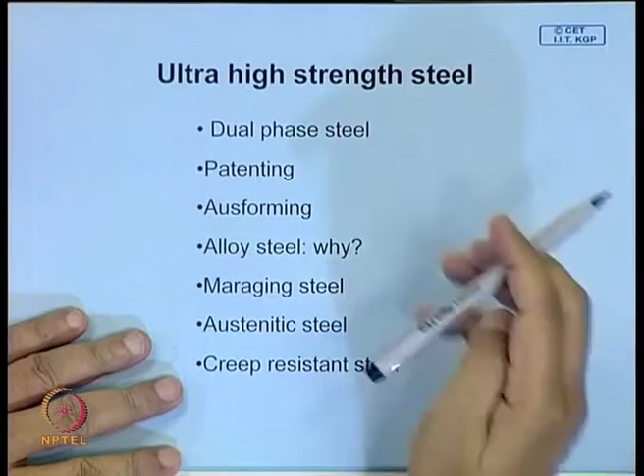of ideal strength of metals. So under this we will talk about several techniques which have been applied. We will talk about a few, like dual phase steel, a special process called patenting, and ausforming. In many of these cases, using these it is possible to attain very high level of strength even in plain carbon steel. Now the question then comes up, why do we then go for alloy steel and unnecessarily increase this cost, because most of the alloy additions which are made are quite expensive.

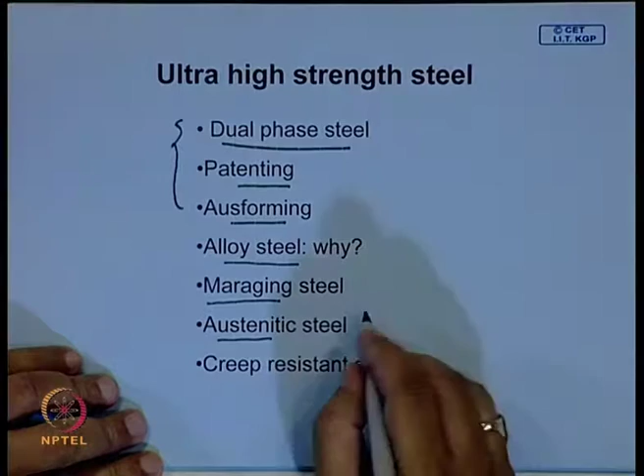We will know why we go for alloy steel. We will talk about two different classes of alloy steels which have very high strength and some very interesting properties. We will talk about Maraging steel, and austenitic stainless steel, primarily its stainless property. Also we will know how our understanding of the principle of physical metallurgy has made it possible to develop the type of steels, creep resistant steel, which are being used in several high temperature components.

Now let us talk about this dual phase steel. In a dual phase steel, what we do is a normal heat treatment process. We heat, suppose this is the composition of steel, this is the part of the iron carbon diagram - this is austenite, this is ferrite plus cementite region. So the normal structure is something like this.

Of this particular composition, you will have pearlitic regions and you will have ferrites, these are ferrite grains. So it is made up of two distinct regions - these are the primary ferrite and this is pearlite.

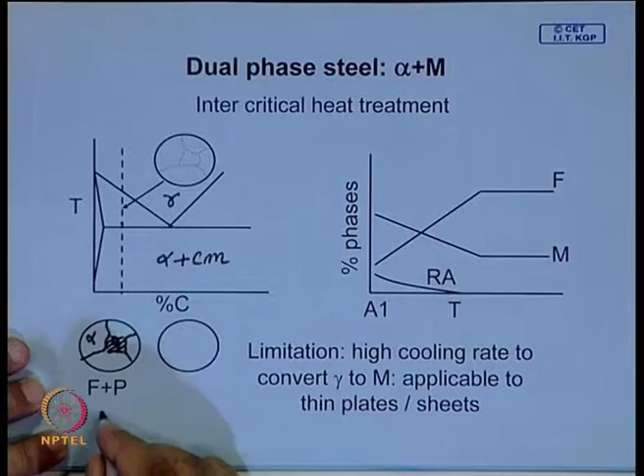You can also see the composition - this point will be giving the composition of ferrite, and this point will give you composition of austenite. Now what will happen, suppose you quench from here, then these ferrite parts will remain unchanged, but this austenite part will convert into martensite. And then instead of ferrite pearlite structure, you will get ferrite martensite.

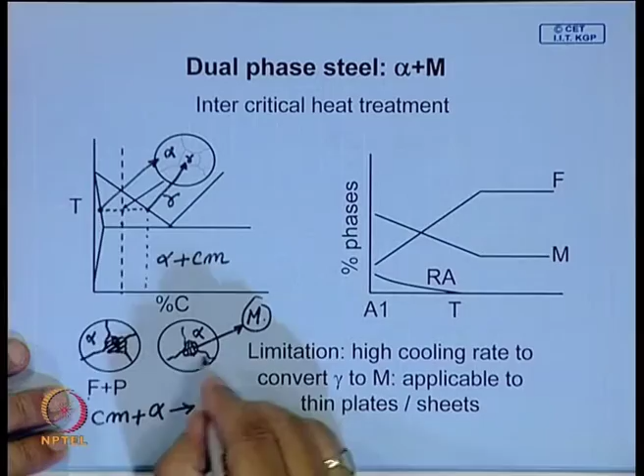And this martensite, since its carbon content is high, it will have very high hardness. So you have a composite material sort of thing, a duplex structure, and this is the advantage of this intercritical heat treatment, which can be implemented in mass production as well.

And what you see is that depending on the temperature at which this intercritical heat treatment is given, you will have different amounts of martensite. If you go higher, say beyond this point, it will approach zero. So beyond this, it will be totally austenite, and if you quench, part of it will convert into martensite and part will form ferrite.

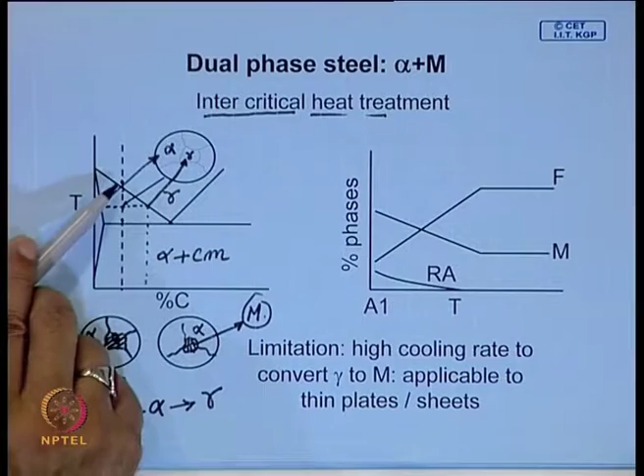So if you quench directly from here, because it is a low carbon steel with low hardenability, even if you quench it very fast, you may not get completely martensitic structure. So this is the critical point - this is A3. So if we say this is A3, if you go above A3, then there is not much of change.

You have a very small amount of martensite and it may have mostly ferrite. This is the percentage phase.

Whereas, if your intercritical heat treatment is given here, then you are likely to have, here, that amount of austenite will be proportional to this region, this line. Amount of ferrite is this, but this martensite, so amount of martensite, so this will be that equilibrium amount.

So even if you quench, you are likely to get some amount of retained austenite, and this will goes on decreasing. So your total structure, say over here, if this is the intercritical heat treatment temperature, it will be ferrite, martensite plus retained austenite, and as you increase the temperature, amount of retained austenite goes on decreasing, and here of course, you will get ferrite and martensite.

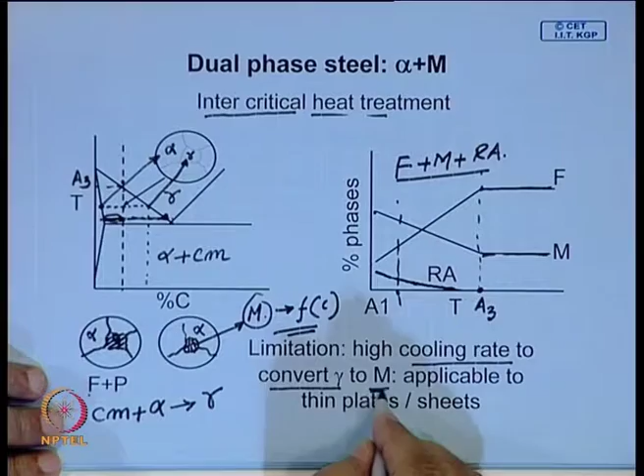that austenite to martensite in plain carbon steel, and it is applicable to thin plates and sheet. So the size limitation stays.

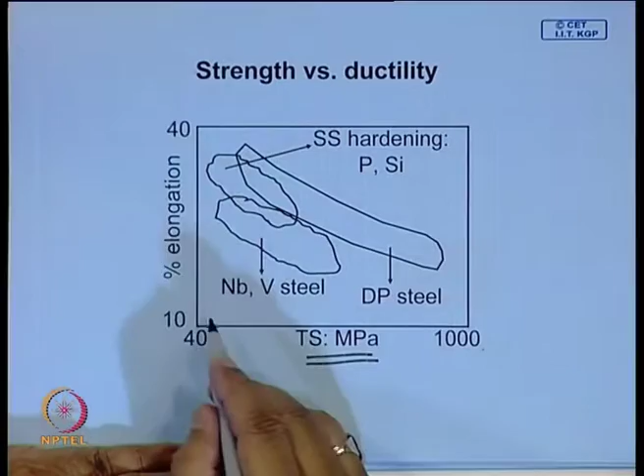Now, dual phase steel, what is most attractive is this gives a better combination of strength and toughness, because in many applications we know that strength may not be enough, it must have a very high degree of ductility. Look at this, this is the region of the dual phase steel, and how does it compare with

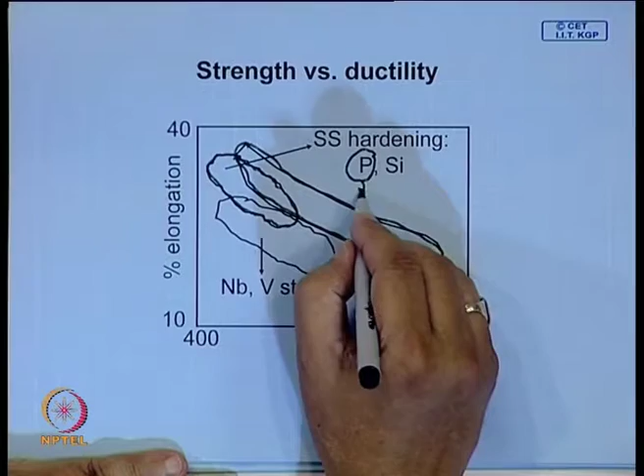conventional steel? Conventional steel's main strengthening mechanism is solid solution strengthening, and solid solution of phosphorus has a very high degree of strengthening, little phosphorus can significantly increase the strength, but it segregates, it makes the steel brittle. So these are the problems.

Silicon is a common solid solution strengthener. Manganese of course does improve, but it is not as strong as phosphorus or silicon. And grain refining is the key strengthening mechanism in case of microalloyed steels.

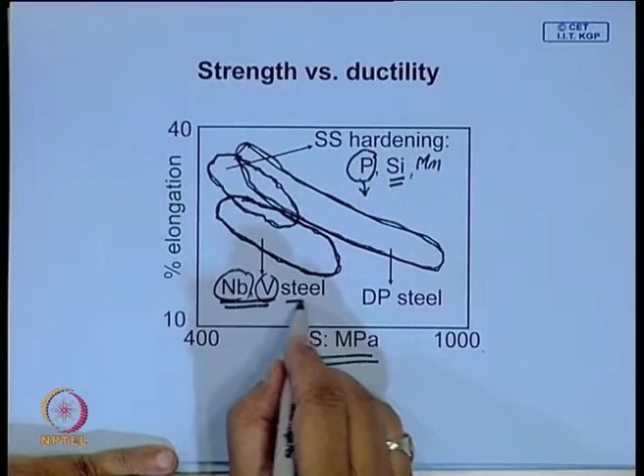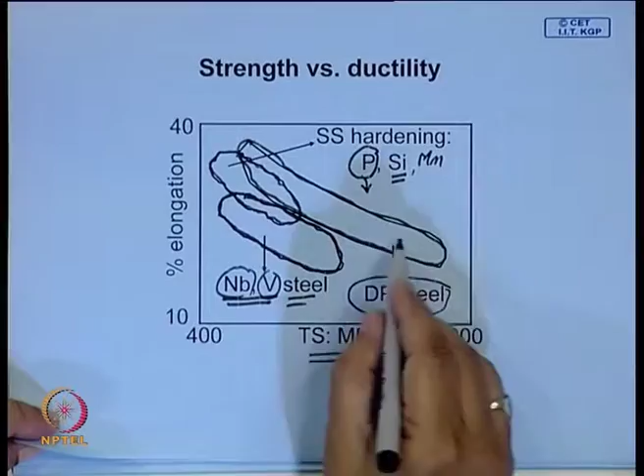So where grain refinement, we looked at it critically. So niobium and vanadium, carbides and nitrides of these elements are the key constituents which inhibit austenitic grain growth, and you get a very fine structure. So compared to all this, dual phase steel has a better combination of strength and ductility, and it also has good formability. That is why there is a special attraction for dual phase steel.

Next, let us consider a special heat treatment process called patenting. This is an isothermal heat treatment process, and it gives very high strength steel wire. This is used to produce high strength steel wire.

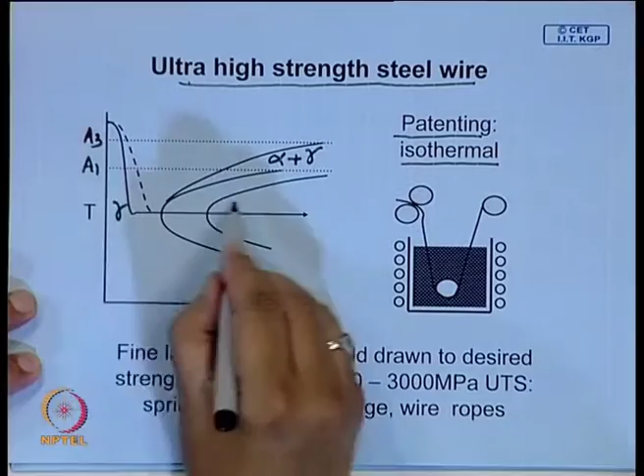If we look at the time temperature transformation diagram of steel, this is the A3 temperature, this is A1, and here you have ferrite plus austenite, this side is austenite. What we tend to do is cool the steel from above, from the austenitic region. When it is austenite, you cool it almost to the nose here.

So this is the temperature of the surface which will cool fast, this will cool slow, this is surface, this is the core, and you maintain it in a bath, a liquid bath consisting mostly of lead. If you have a liquid metal bath, this whole time may help in making the temperature uniform and allow it to cool, allowing transformation to complete at the same temperature.

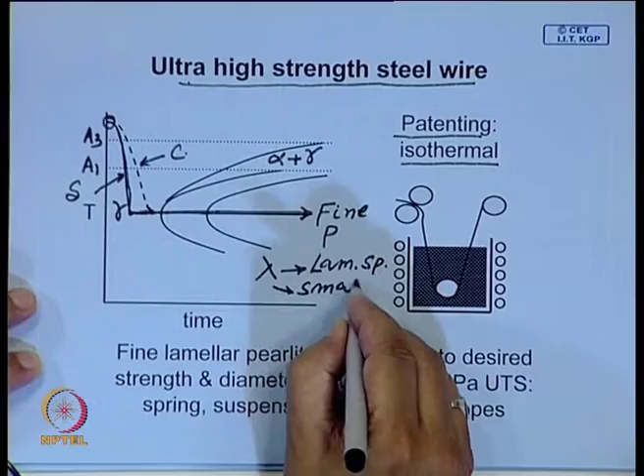And what we are trying to get is fine pearlite, that means the lamellar spacing lambda is very small, and under an optical microscope the pearlite will not resolve.

So normal pearlite you do see these kinds of lamellar structure, but the main idea is if you look in a standard optical microscope, maybe you will find that most of these pearlite nodules are not resolvable. And how is it done?

So these are some guide rolls, and this is an idle guide. So this is a lead bath, molten lead, and this passes through here.

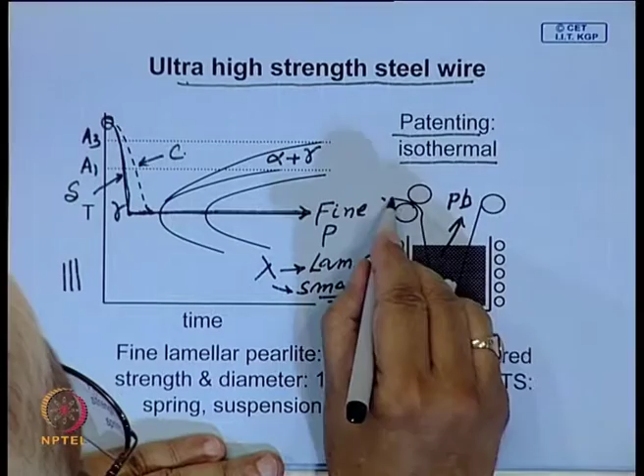You may straighten this in a roll, and sometimes you can heat it also. You can apply some voltage between this and this, and this is a lead bath, with heating coils. This can be set up easily in the laboratory, and you can apply some voltage.

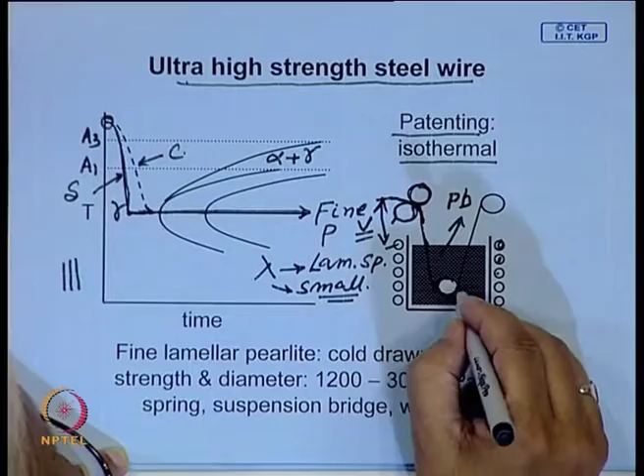Then the wire gets heated up, and this temperature is above A3. It comes into the lead bath, and this is just a guide idle roll, and this wire comes out and it coils here.

By this treatment it is possible to get extremely fine lamellar pearlite, which has excellent drawing properties, so they can be cold drawn to desired strength and diameter. You can get a strength of the order of gigapascals.

These are used for very high strength applications like springs, suspension bridges, high tensile wire ropes. Strength will increase definitely as the percentage carbon goes up.

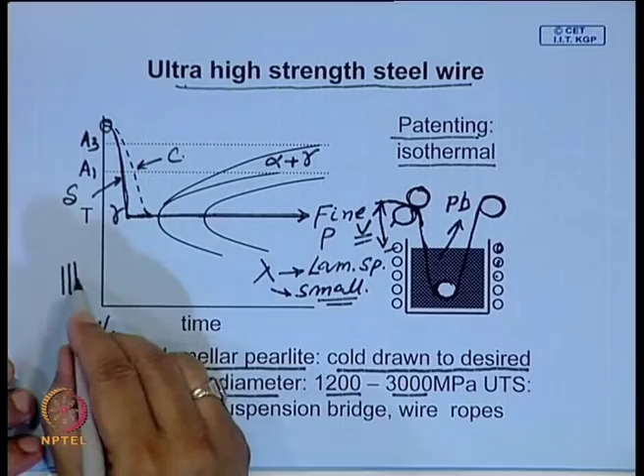In fact, this lamellar structure, when you give such high cold working, say 90% cold work, these lamellar spacings become even smaller. With the transmission electron microscope, people have seen these spacings come out to be of nanoscale dimensions as a result of such large deformations, and that is responsible for such high levels of strength.

Now let us look at another special forming process called Ausforming. In microalloyed steel, what we found out is if you work austenite at a lower temperature, that austenite will not recrystallize, and these austenite grains, if you deform in one direction, become highly elongated.

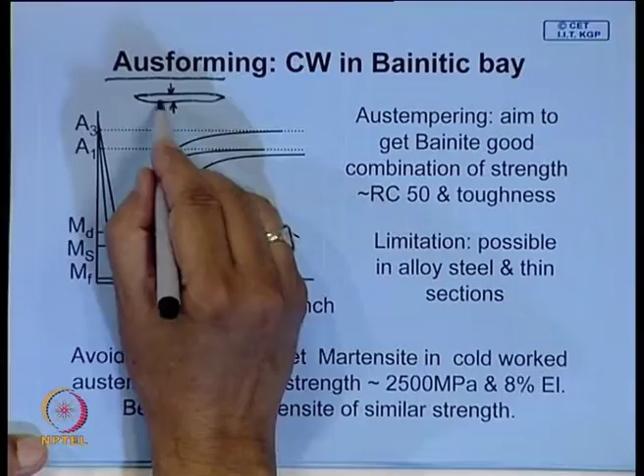So at least in this one direction they become extremely small in dimension, and they do not recrystallize. So they will also have high dislocation density, so rho will be high, the dislocation density is high.

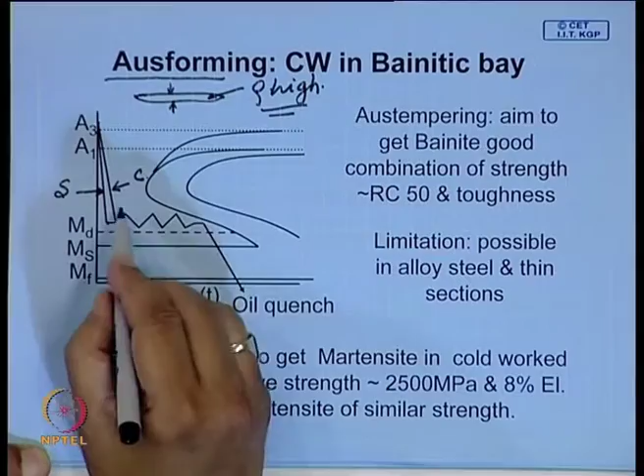Now if you cool austenite to a region, we have seen most steels have a bainite bay. If you are able to cool to this temperature - this being the core temperature and this the surface temperature - you cool here and then give working at this region, with sufficiently long hold time, but make sure you do not go too close to MS.

In fact, this working has to be done at a temperature higher than the MD temperature. This means that if you work the steel, the martensitic start temperature goes up. This is the martensitic temperature for a certain percentage of deformation.

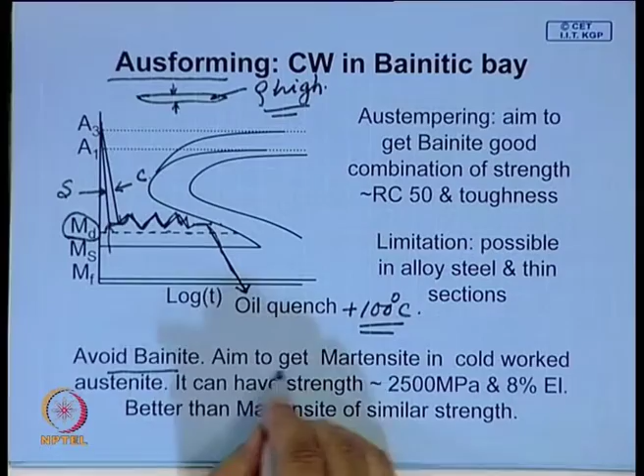So you give cold working above MD, and after the cold working is over and before bainite starts forming, you quench the steel. After this it is necessary to give some tempering, maybe 100 degrees centigrade, to relieve internal stresses. But the key thing is you avoid bainite and get martensite in cold worked austenite.

So austenite is also very hard, and within that you also get finer martensite, with much higher dislocation density. Here you can attain a strength level that is quite high, yet you will have sufficient ductility, which is not possible in martensite of similar strength.

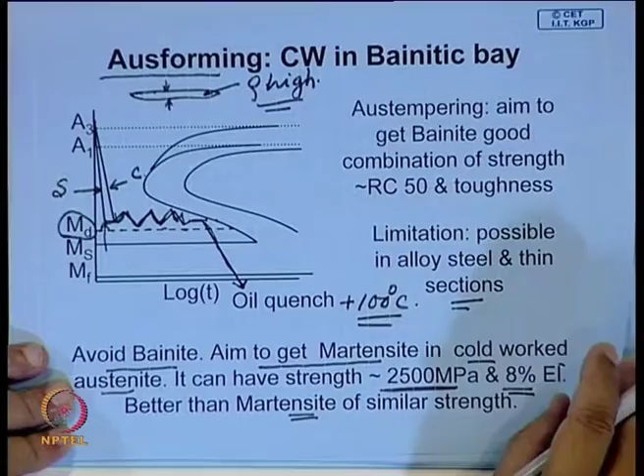Although this type of heat treatment can be given in plain carbon steel, often it is not so easy to do because of section size limitations. But if you go for alloy steel, possibly you can go to a higher section size, and that limitation may not be as critical. We will look into that.

Now let us look at why we need alloy addition. Why go for such expensive alloy additions when such a wide range of strength and toughness can be achieved in carbon and microalloyed steel? Is it really necessary? Because alloy additions always make steel more expensive.

Now the major limitation is that plain carbon steel has poor hardenability, and you have section size limitations. In plain carbon steel, even with infinite quenching - say an extremely high rate of quenching, ideal quenching - you may be able to get through-thickness hardness, meaning 50% martensite at the core, up to maybe, depending on carbon content, up to say 10 millimeters.

So for many applications this is too small. Suppose one application that comes to mind right now is the landing gears of aircraft. This is a part of the aircraft, it has to fly.

Obviously your aim will be to use a very high strength material, so that the strength to weight ratio is high, so that the structure is light and it can fly. In this case, the dimension may be of the order of 80 millimeter diameter.

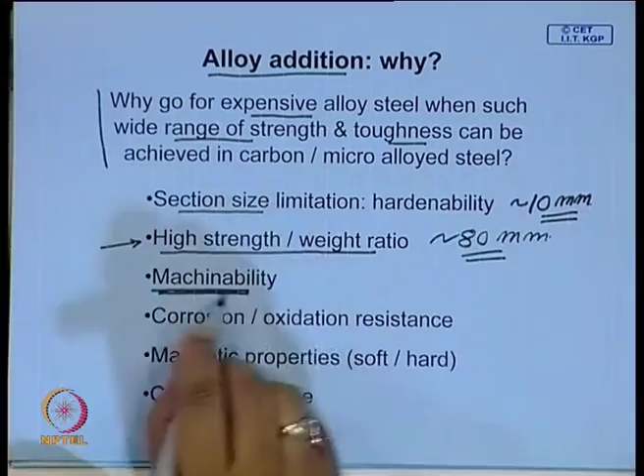Sometimes to get certain very specific properties, many applications like nuts and bolts require the material to be machinable. Normal steel's machinability can be improved significantly, not only by heat treatment - if you have globular cementite, machinability is higher, but most steels used for nuts and bolts may not have a high amount of carbide.

So machinability is improved by adding some inclusions. To take care of sulfur, we add manganese to form manganese sulphide inclusions. In fact, for machinable steel, sulfur is intentionally added along with a little more manganese to take care of it, and the presence of these manganese sulphide inclusions gives the steel good machinable property. So not only hardness and hardenability limitations, but also specific properties require adding alloy elements.

Another important property is corrosion and oxidation resistance. Steel rusts. To protect it from rusting, we use many techniques like coatings - you galvanize the steel to protect it. For most sheet applications, you galvanize steel to protect it from rusting, but in many cases this may not work, so you may need to improve its corrosion resistance.

To improve corrosion resistance, you add certain alloying elements, and one of the most common is chromium. If present in dissolved form greater than around 12%, say 12.7 to be specific, in that case the steel has a thin protective coating of oxide which makes it stainless. So all stainless steel will have a minimum of 12% chromium, and this chromium must be present in solid solution.

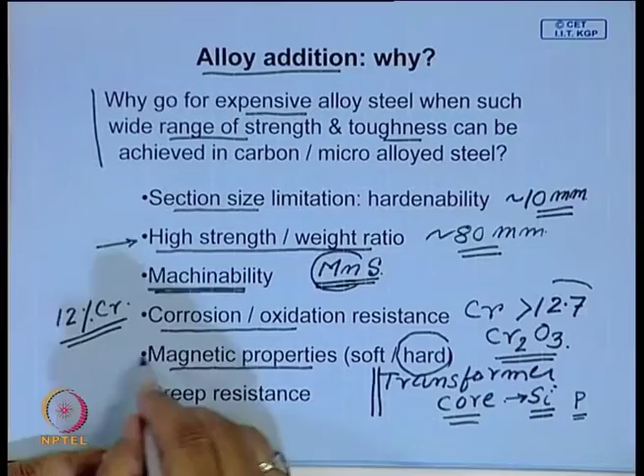To cut down the hysteresis loss, often in steel we use some special alloy elements, particularly silicon. Some steel also has phosphorus added - these are electrical grade steels. So you need to get certain specific properties. Similarly, to get a hard magnetic property - transformer core is soft magnetic - for hard magnetic property, other special elements need to be added. So alloy additions are necessary to improve certain specific properties.

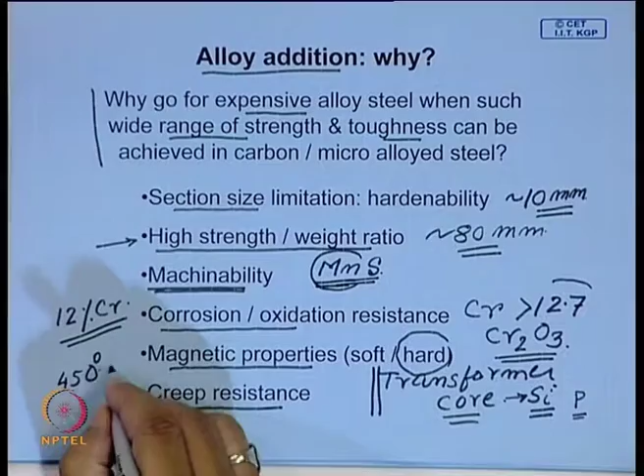Another major application of steel is in power plants, say steam power plants and boilers, where the steel has to be used at temperatures above, say, 450 degrees centigrade. In this case creep becomes one of the important failure mechanisms, so you need alloy addition which gives it better corrosion resistance and better creep resistance.

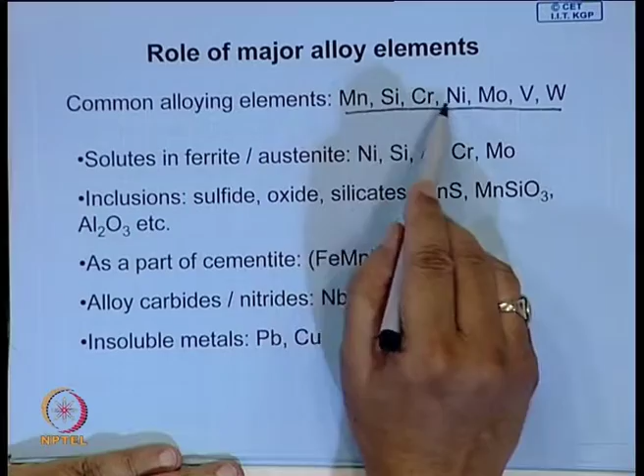Now, when you add alloy elements to steel, where do they go and what role do they play? I think this will vary from element to element. Here are some common elements present in steel - this list is by no means comprehensive, there can be several others also possible, but these are the major alloy elements.

Bulk of the steel that we use is ferritic steel, and many of these alloy elements are soluble, even if to a limited extent, in ferrite, and in the high temperature phase austenite also they have some degree of solubility.

So, they will be present as solutes, as substitutional solute elements, in ferrite and austenite.

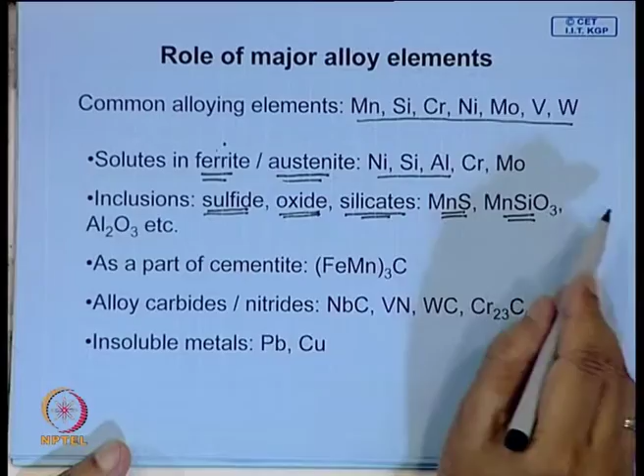Some of the elements you add react with impurities present during the steel making stage. There will be oxygen, it reacts with oxygen to form oxide. There will be some sulfur, it reacts with sulfur and converts into sulphide, and silicon is also present in steel, some form silicates. Some examples are manganese sulphide, manganese silicates, iron silicate. So these are possibilities, you can also have oxides.

Aluminum, as we have seen, is used as a deoxidizing agent and it gives fine grain steel. So alumina is also an inclusion, and some of these inclusions deform easily during hot rolling.

Elements like manganese sulphide, if present, get elongated, as do silicates, and the presence of these elongated inclusions makes the properties directional. Suppose there is an inclusion like this, in the transverse direction it will have lower strength. It will not affect strength along the longitudinal direction, but transverse properties, particularly ductility, get affected.

They are also difficult to weld because of these inclusions, and they give rise to a defect commonly known as lamellar tearing. So inclusion control becomes necessary; control of shape and size of inclusions is key to improving properties like weldability or transverse strength, whereas hard particles are present as globules.

Some elements may dissolve in cementite like this, and many elements you add, such as niobium, form carbides and nitrides like vanadium nitride. Tungsten also forms carbide, moly also forms carbide, chromium also forms carbide. There are certain metals added, like lead and copper, which are insoluble, so they are present as globules of lead or copper.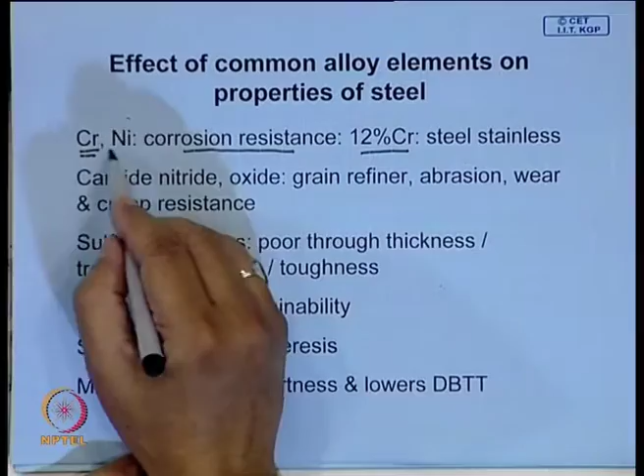Now, a few of these common alloy elements and their effects are listed here. Chromium is known for its corrosion resistance; with 12% chrome, steel becomes stainless. Nickel also improves corrosion resistance, particularly in acid, sulfuric acid environments. Many stainless steels contain both chromium and nickel, and if you add very high amounts of nickel, you can make the austenitic phase stable at room temperature, which we will discuss subsequently.

Carbides, nitrides and oxides act as grain refiners. Tungsten carbide adds to abrasion and wear resistance. Some carbides like chromium carbide, particularly molybdenum carbide, add to creep resistance. These precipitates, if they form along the grain boundary, inhibit grain boundary sliding and improve strength.

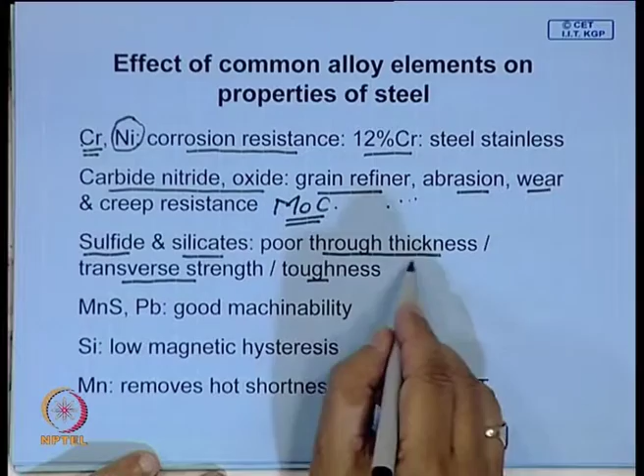Similarly, sulphides and silicates give poor through-thickness properties or transverse strength and toughness. They also cause problems with weldability, though these inclusions give good machinability.

Silicon gives low magnetic hysteresis. Addition of manganese removes hot shortness, as we did talk about, a problem related to sulfur content in steel.

Sulfur segregates to grain boundaries, and if manganese is not there, it will form with iron an iron sulphide low melting eutectic, which gives steel poor hot workability, known as hot shortness.

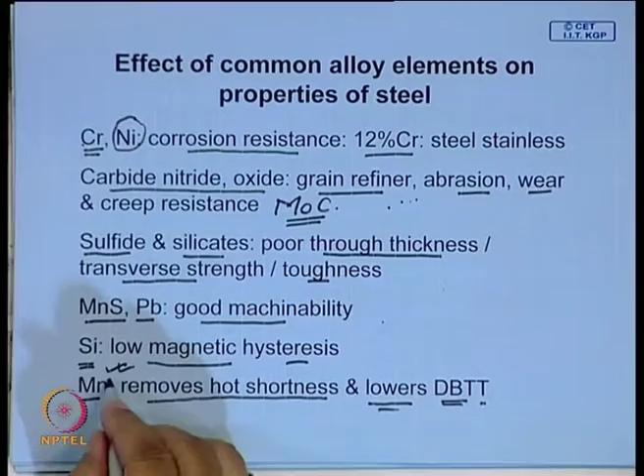Addition of manganese is extremely important to lower the ductile to brittle transition temperature. All cryogenic grade steels will have a sufficient amount of manganese.

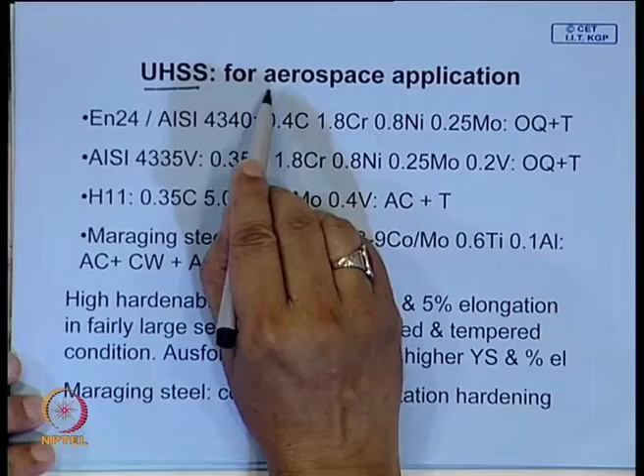Let us look at a few common ultra high strength steels. Many of their potential applications, obviously, having high alloy elements, are expensive, but nevertheless applications like aerospace, where cost may not be a major limitation, because one major criterion is the structure should be light and it should be able to fly.

This is the composition; a very popular grade is EN24 or AISI 4340. The composition is 0.4 carbon, 1.8 chromium, 0.8 nickel, 0.25 moly. The moly takes care of many issues in this steel.

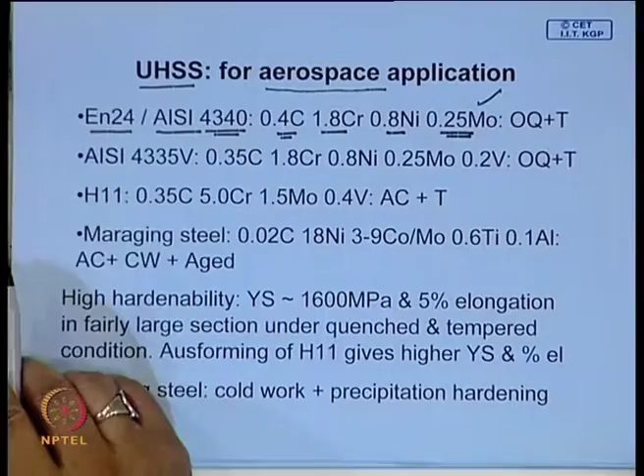When you add these alloy elements, there is a problem of temper brittleness. Addition of moly overcomes that brittleness, and it is used in oil quenched and tempered condition. Because of these alloy additions, it has good hardenability.

By oil quenching, you will be able to harden through and through, particularly for landing gear type applications. This is very useful. There is another grade almost based on that; vanadium addition adds to the strength. Here also the treatment is similar: oil quench and temper, from the austenitic temperature range, and obviously we look for fine austenite grain, so you do not heat it too high an austenizing temperature.

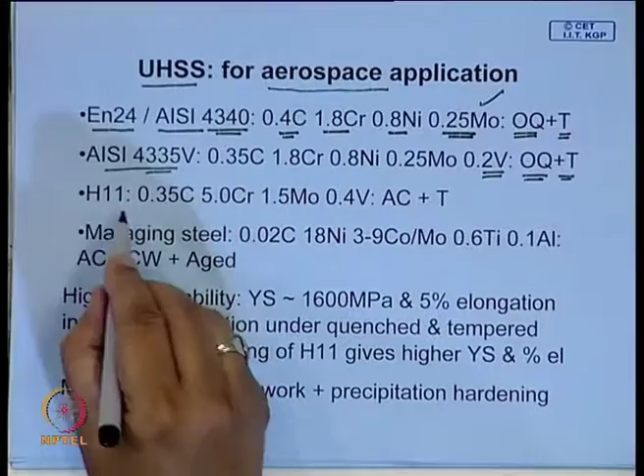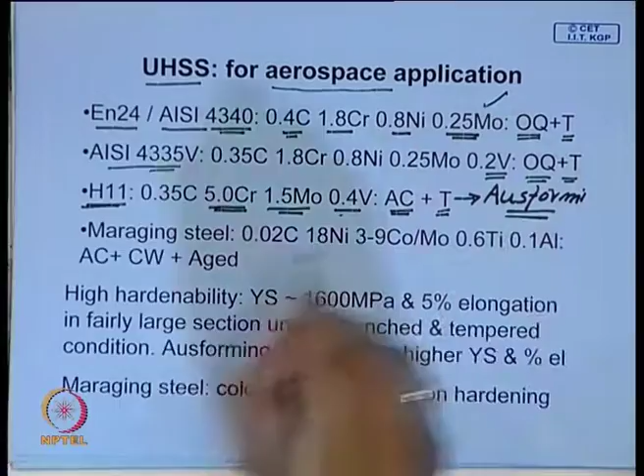There is a grade called H11 alloy steel, which has much higher alloy element, and so much moly present makes this bainite bay very long. This type of steel, even if you air cool, possibly you will get martensite. So you can air cool, your quenching stress problems are not there, and then you give temper, and it can also be given ausforming.

By this you may get even higher strength and toughness properties. Another grade is steel, we will talk about it later separately, maraging steel. Here this has a very low carbon content, but high nickel, and you have some amount of cobalt, moly, and to get some precipitation you add titanium and aluminum.

Main thing is you look at that carbon content. Martensite is hard because of carbon, and if you reduce carbon to this level, definitely the martensite will be soft. This martensite you can cold work, so they may not have that high hardness, and it is aging, meaning when you age, these are the elements which develop some coherent precipitates in the matrix, and because of the formation of these fine precipitates, its strength goes up.

Now, all of these steels have high alloy element, so they have high hardenability, and you can always get strength of the order of GPa, with 5% elongation in fairly large sections. As I mentioned, this is amenable to ausforming and you can even get higher yield strength and ductility.

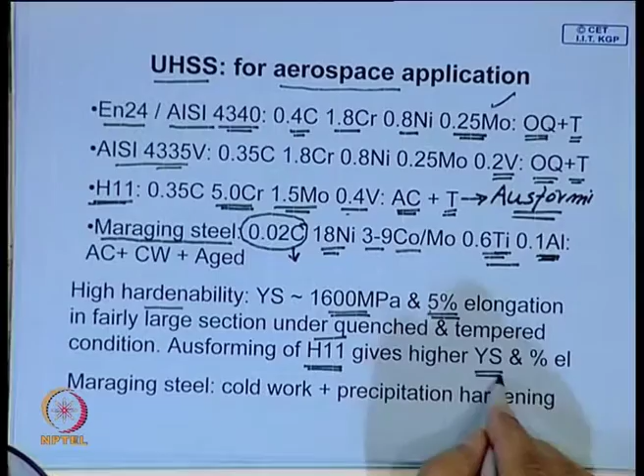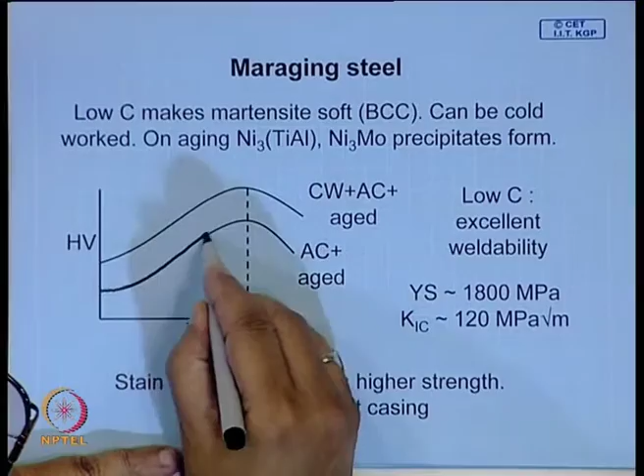Now, maraging steel - we mentioned that martensite is soft, it can be cold worked and then given precipitation hardening heat treatment. When you give this hardening treatment, aging treatment, the hardness goes up. If you do not give any cold work, possibly the hardness increases like this - air cooled plus aged. Whereas if you cold work and then age, in the cold worked martensite, when precipitates form, it gives much higher level of strength, and on aging these are the precipitates that form.

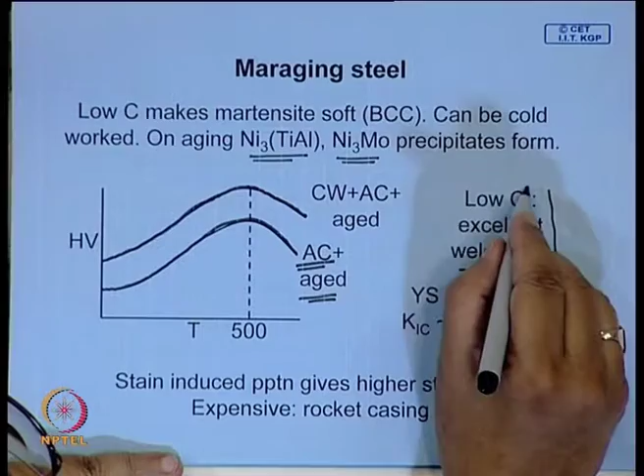And because of low carbon content, they have excellent weldability. We will see later that carbon is the main alloy element which is detrimental, which makes the steel difficult to weld. So for good weldable quality steel, attempt is always made to bring down the carbon content, and here the strength is extremely high. It also has very high fracture toughness.

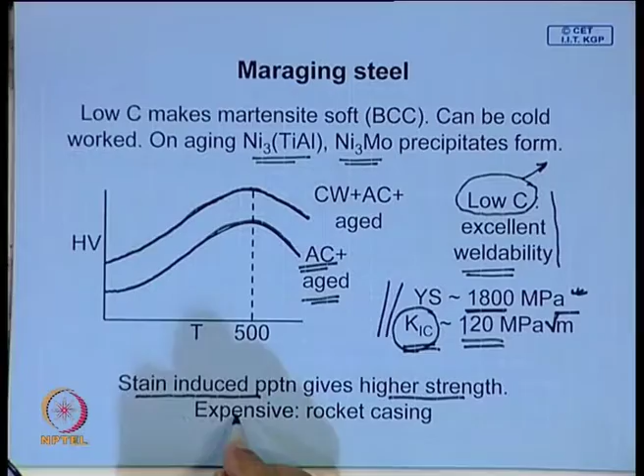We did talk about K1C, which is a measure of fracture toughness. Such a high level of fracture toughness, 120 MPa root meter, at 1800 MPa strength, is unheard of. So this is a very special grade of steel. Here you have strain induced precipitation, which is responsible for its high strength. This is no doubt expensive, you have 18% nickel. Nickel is the most expensive amongst the common alloy elements which are added, but it is a unique material for rocket casing and aerospace applications.

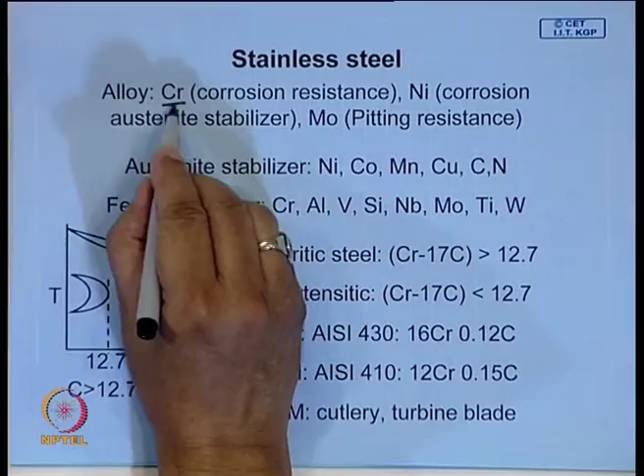Now let us talk a bit on stainless steel. We have seen the main alloy element which gives stainless steel is chromium. You must have at least 12% chromium to form a protective coating of chromium oxide. Along with that, we also add nickel to improve corrosion resistance. It also is an austenite stabilizer - if you add a certain amount of nickel, the steel becomes austenitic. And we add moly to give it pitting resistance.

Now some of the common austenite stabilizers are listed here - even carbon, and nitrogen, they are also good austenite stabilizers.

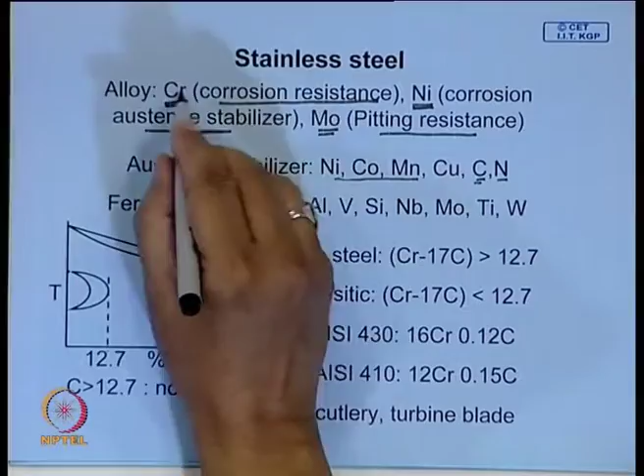Now a quick look at this ferritic steel, the iron-chromium binary diagram. Chromium is known as a gamma loop forming element. So here you have ferrite, sometimes we call it alpha or delta, it does not matter. So this side is ferritic. If the amount of chromium goes beyond a critical limit, if you heat the iron-chromium alloy, it remains ferritic until it melts. So you cannot form austenite.

So if you have too much chromium, then the steel cannot be hardened or given martensite by quenching. The question of getting martensite does not arise, because you are not able to reach the austenitic state. This is one important point you must remember. This is a binary alloy and the composition is quite important - this gamma loop is around 13%. So if it is greater than 12.7%, it is ferritic until its melting point.

So, this is important to remember: if the chromium equivalent is greater than 12.7, then you have no chance of forming austenite. So if you have a stainless steel where carbon is present, and we have seen carbon is an austenite stabilizer, then if you have some carbon in the steel, the effective chromium concentration goes down. This is a factor of 17 times the carbon content. So if you have 0.1% carbon, you add 1.7 to this, giving 13 plus 2, around 15. So if this effective value is greater than 15 chromium, and in normal steel you will always have some amount of carbon...

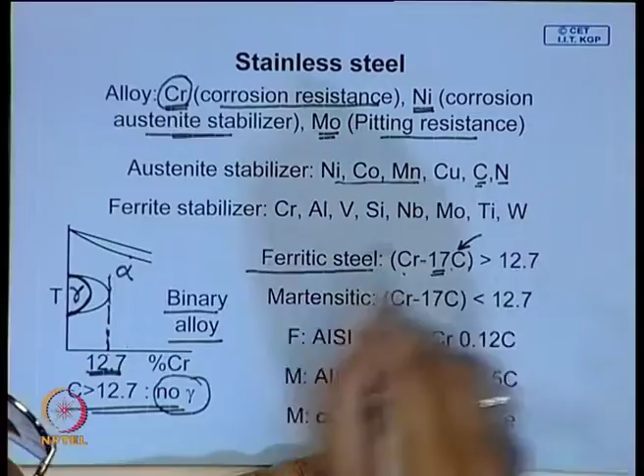So if it has around 0.1 carbon, and chromium is greater than 14 or 15, then you do not expect austenite to form, and this type of steel is known as ferritic steel. It will be stainless because it has more than 12% chromium in solution. And if this is less than this threshold, then we call the steel a martensitic grade. Common ferritic and martensitic steel compositions are given.

One particular composition is 16 chromium, 0.12 carbon. You will find it will satisfy this relationship, and this will be ferritic. It cannot be given any hardening treatment. The only way you can harden it is through some solid solution strengthening or cold working.

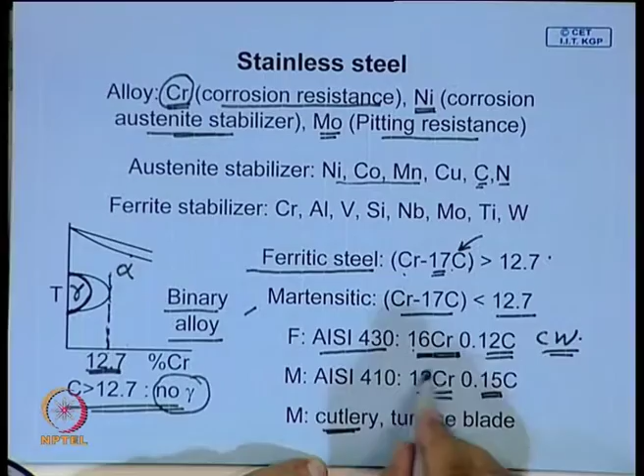Whereas if you have, in this particular case, 12 chrome 0.15 grade, this is a martensitic grade stainless steel. It can be heated to the austenitic region, and on quenching you get martensite. This is a steel commonly used for cutlery. Some turbine blades, and engine turbine blades, are also made up of this type of steel.

Now, to look at what the structure of the steel will be, whether it will be ferritic, whether it will be martensitic, or in the extreme case austenitic, that is represented very well by a diagram called the Schaeffler diagram.

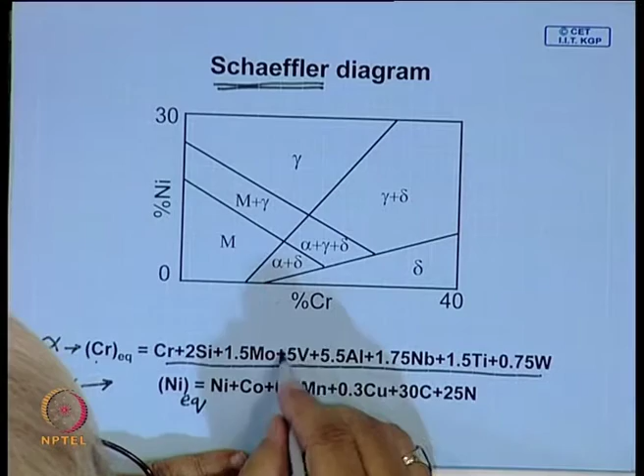So all alloy elements can be grouped into two parts: one stabilizes ferrite, another stabilizes austenite. What you can find out is the nickel equivalent or chromium equivalent. So they stand for all ferrite stabilizers, factors which are given here. Some elements are known as very strong ferrite formers, they raise the temperature range in which ferrite is stable. Look at vanadium and aluminum, they are very strong ferrite formers.

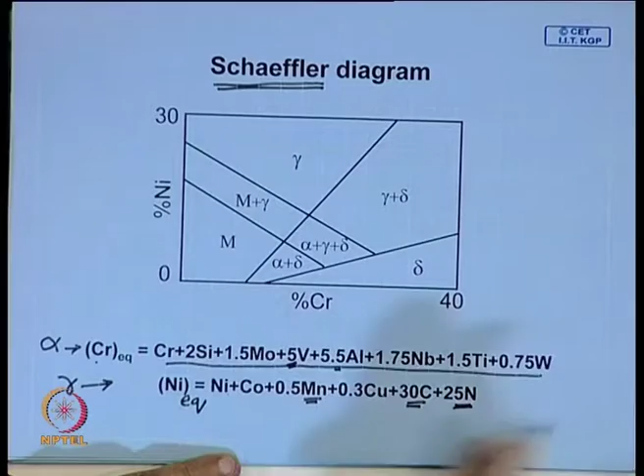Similarly, there are certain other alloy elements like manganese which stabilize austenite. Carbon is a strong austenite stabilizer, and so is nitrogen. So for austenitic grade you try to have a high amount of nickel and some of these austenite stabilizers. And it is possible if you have this chromium equivalent around here, and nickel equivalent here.

So from here onwards, in all this region you will have austenite stable at room temperature, and it is very easy to check whether the stainless steel is austenitic or not, by checking whether it is non-magnetic. Gamma iron is... alpha is ferromagnetic, whereas this is non-magnetic, paramagnetic. So you will find that ferritic steel will be attracted by a magnet, but not austenitic steel. So one of the main applications of austenitic steel is utensils, and when you buy utensils, you often check whether they are attracted by a magnet.

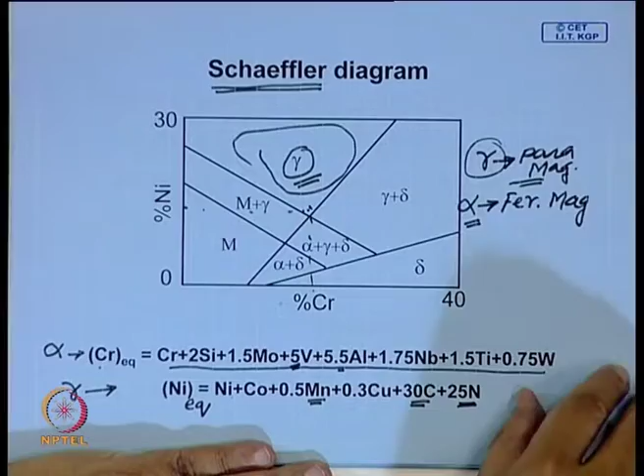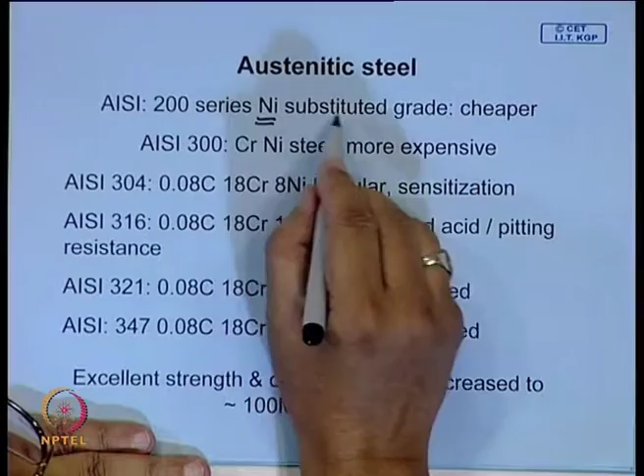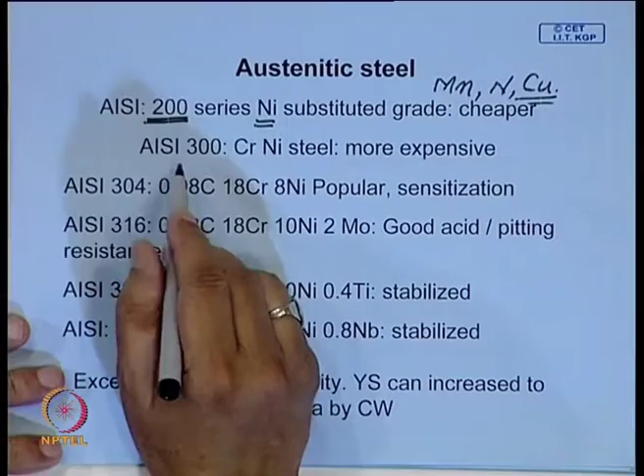Now, we have talked about ferritic and martensitic grade steel. Let us now look at some austenitic grades of steel. Nickel is a very expensive alloy element, so there have been attempts to have austenitic grades which are cheaper, where nickel is substituted either completely or partially. Common elements used to substitute are primarily manganese, nitrogen, and copper. These are used to stabilize austenite to room temperature. The most common grades, the AISI 200 series, are manganese-substituted austenitic stainless steel. Ferritic and martensitic stainless steels are also stainless, but austenitic steels definitely are stainless because they all have a very high amount of chromium.

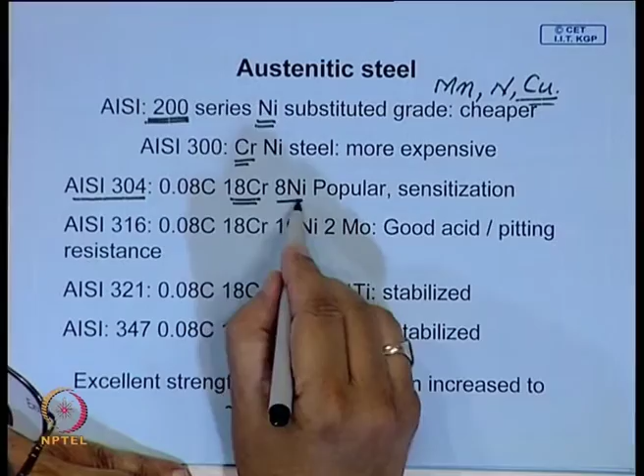One of the most popular grades is AISI 304. Here you have 18 chromium, 8 nickel, but it also has some carbon content, and we will see the effect of carbon a little later — this is responsible for a corrosion-related problem called sensitization.

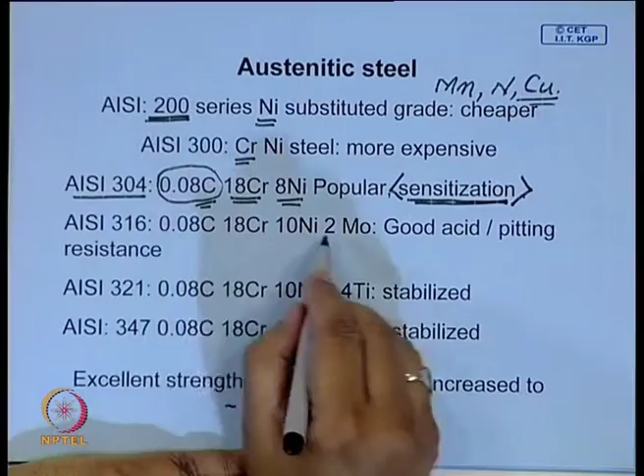Under this condition, these are susceptible to intergranular corrosion, and to avoid that, certain alloying elements are added like molybdenum. It gives better acid resistance or pitting resistance. You have a little higher amount of nickel to give acid resistance. This is another popular grade, AISI 316.

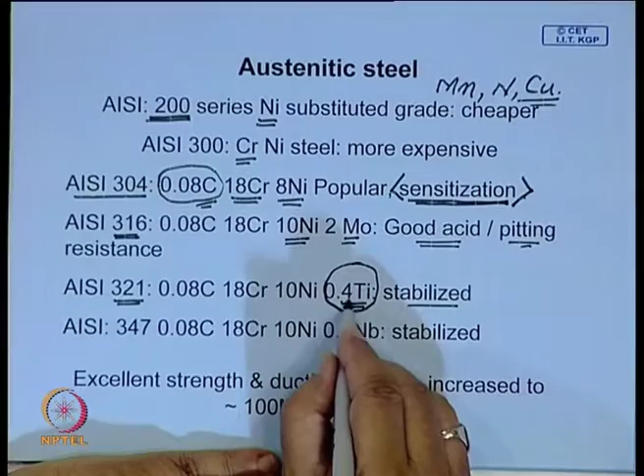Another is AISI 321. This is called a stabilized grade. We will see later why stabilized. You add a certain amount of very strong carbide former, and another popular grade is AISI 347. This contains niobium, a strong carbide former. This is also a stabilized stainless steel.

The main important property of austenitic stainless steel is it has excellent corrosion and oxidation resistance. It can be used for high temperature applications, and it has not only high strength but good ductility as well. But the main problem is it is not amenable to heat treatment, like martensitic heat treatment is not possible. The only way it can be strengthened is by cold work, and yield strength can be increased up to around 1000 by cold work. By giving cold work, you can increase its strength significantly.

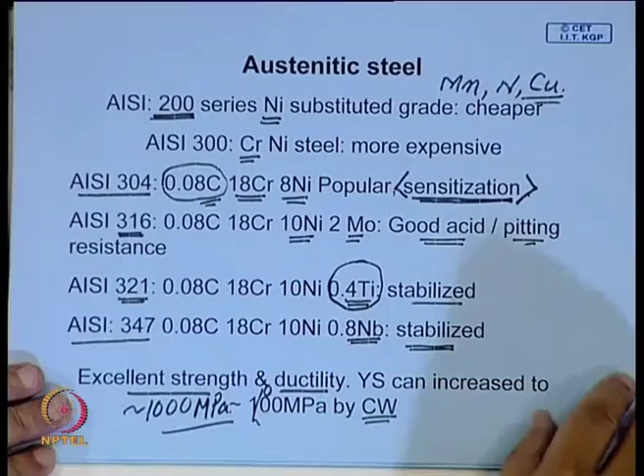Now let us look at what is sensitization. We mentioned that oxidation or corrosion resistance of steel is derived from chromium, and this chromium must be present in solid solution for the steel to have good corrosion resistance. No matter whether it is austenitic or ferritic, this chromium must be present in solid solution.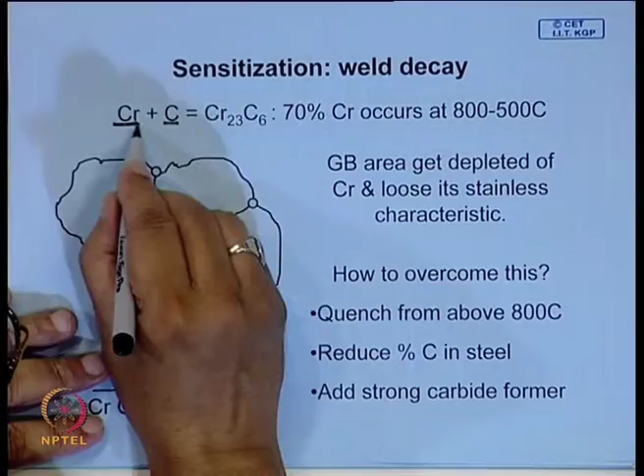Now the problem that comes up is austenite can dissolve a sufficient amount of carbon as well. So in this austenitic stainless steel, the carbon dissolved in austenite and the chromium which is also dissolved in austenite, it is possible that they may react to form carbide. This happens if by chance the steel is heated to these regions, which is often very common. If you are trying to weld the steel to make a vessel or something, some of the area will be heated to this region, and then this type of precipitation will occur.

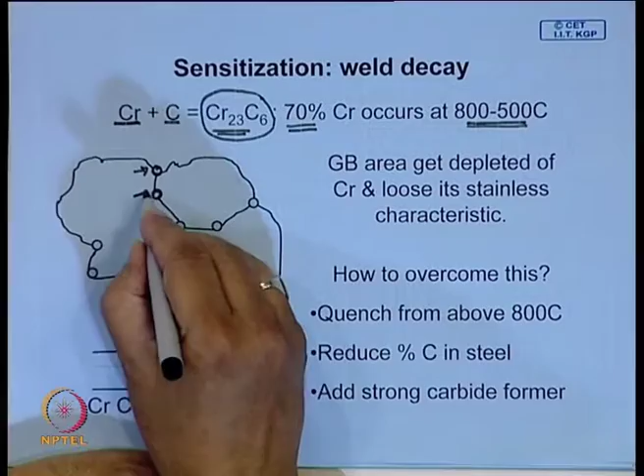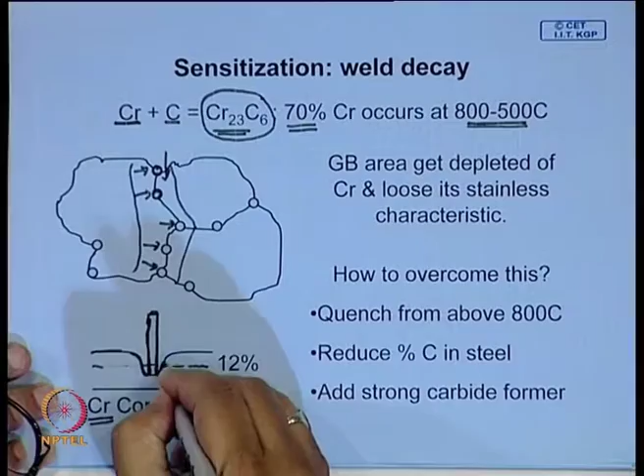When this precipitation occurs, it consumes a significant amount of chromium, around 70% chromium in chromium carbide. If this chromium carbide forms at the grain boundary, the surrounding region gets depleted of chromium, and it comes here. So you have a region depleted of chromium, and this loses its stainless or corrosion resistance property. Therefore, this is where it gets attacked by the environment, and it is susceptible to intergranular cracking. This is the chromium concentration profile you can think of: the base chromium is 12%, suddenly it comes down, and near the precipitate it goes up to 70%.

Now the question is, the main reason for this is the grain boundary area gets depleted of chromium and loses its stainless characteristics. Therefore, grain boundaries are susceptible to attack and susceptible to intergranular cracking.

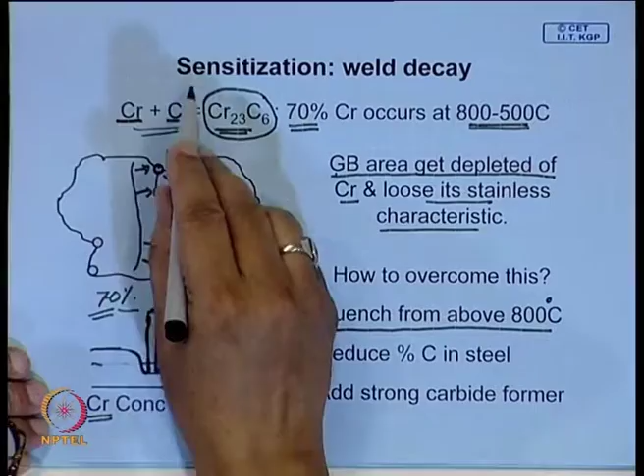How to overcome this? One way is, if you quench from above 800 degree centigrade, which is not always possible, then you do not get enough time for this reaction to take place, because above that temperature most of this is soluble in the matrix. But if a material has already been sensitized, this treatment can overcome that problem. Another alternative is to reduce carbon. There are certain grades like 304L with very low carbon. In that case, it is possible that it will not be susceptible to this sensitization problem.

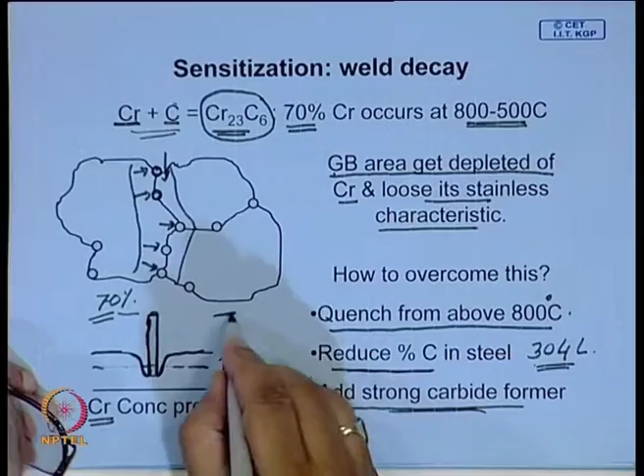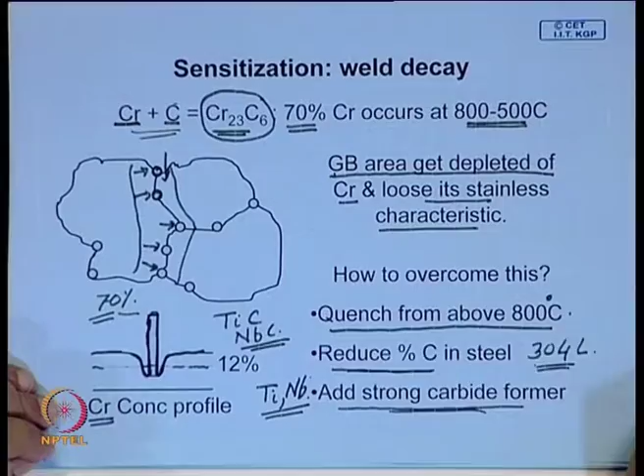Another more common way of avoiding it is to add a strong carbide former like titanium or niobium. This reacts with carbon and forms titanium carbide or niobium carbide, which have a stronger affinity for carbon than chromium. Therefore, chromium does not get enough carbon to react with, and chromium is forced to remain in solid solution. These are the very common ways of avoiding the sensitization problem in steel.

Now a quick look at creep resistant steel. We talked about creep, which is a time dependent deformation in any component used at high temperature. In that case, there will be time dependent deformation, and this is a thermally activated process. So if you are looking for a steel or any alloy which can withstand high temperature or high stress at high temperature, what do you look for?

You look for a material that must be able to withstand that environment at that temperature. It must have good oxidation resistance, or it must have good creep resistance. For oxidation resistance, the common alloy element is chromium. For creep resistance, the common alloy element is moly.

Another requirement is structural stability. It should have a very stable structure, and preferably some stable precipitate. Stable precipitates are coherent precipitates. Coherent or semi-coherent precipitates are most stable.

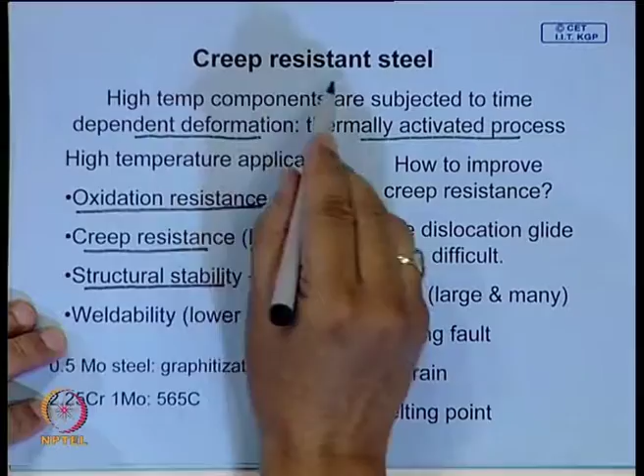So you look for such features in the alloy. Often in creep resistant steel, if you are making a boiler superheater, you must consider not only creep resistance but also good weldability, because the main fabrication technique will be welding, and these tubes are welded. So often there is a limit that it will have lower carbon.

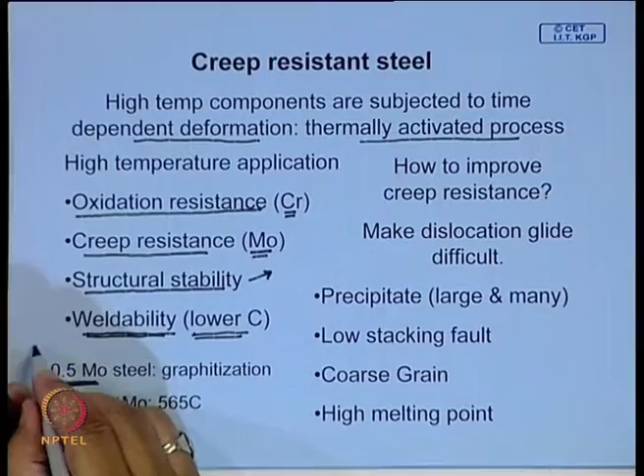Now, the earliest creep resistant steel was used in older power plants which do not operate at very high temperature, maybe around 450 degree centigrade. There, half moly steel is good for creep resistance, but this is known for a problem called graphitization.

With prolonged use at high temperature, carbide gets converted to graphite, and that is a major problem. How do you overcome this? This is overcome by adding chromium and a little bit of moly. So 2 quarter 1 moly is a very common creep resistant steel, and this is used at 565 degree centigrade.

The main question that comes up is how to improve creep resistance. It is a time dependent deformation, and we know the main reason for deformation is dislocation glide. If you can make this difficult, how do you do it? You introduce precipitates - large and many precipitates, to make dislocation glide difficult.

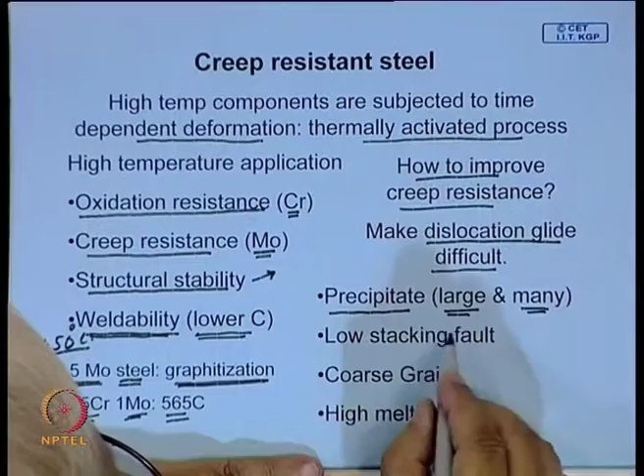Sometimes you can make dislocation movement difficult by lowering stacking fault energy, like in austenitic steel. They have low stacking fault energy, so therefore screw dislocations will have difficulty - movement cannot cross slip.

Another important factor is coarse grain, and obviously when you are looking for creep resistant steel for anything working at high temperature, you will definitely be looking for steel or material which has a high melting point.

These are the common creep resistant alloys we talked about, and this is a newer grade of steel currently used in supercritical power plants. It can go up to 600 degree centigrade. It has a higher amount of chromium and some strong carbide formers, which gives stable carbides and forces moly to remain in solid solution to give it better creep resistance.

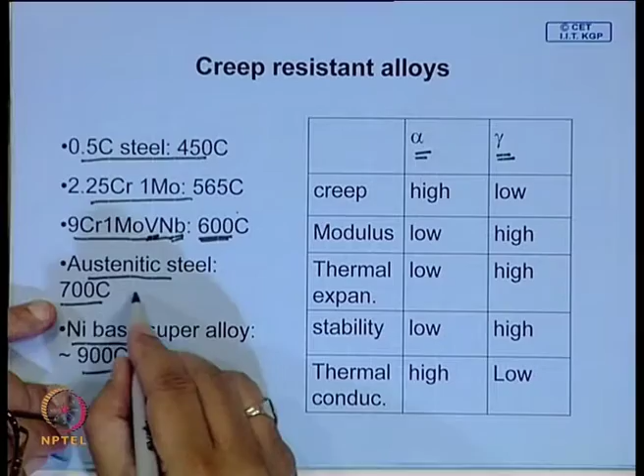Austenitic steels have good creep resistance, and at higher temperature you go for nickel based super alloys. There is often a debate going on whether ferritic steel or austenitic steel are better for creep resistance. No doubt, at higher temperature where phase stability is considered, austenitic steel - you do not have an alternative.

This has higher temperature capability, but for ferritic steel it is possible to improve its temperature capability to 650 degree centigrade, and it has certain advantages, like low thermal coefficient of expansion and higher thermal conductivity, which are also quite important.

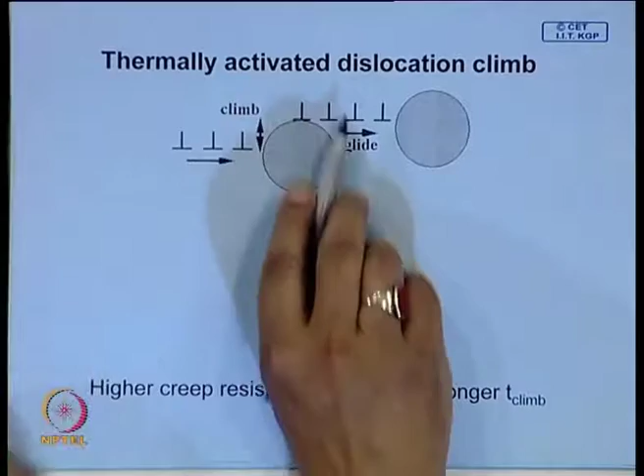Some of these properties are compared for ferritic and austenitic steel, and this diagram is actually trying to represent - I will quickly go to that - pictorially how you improve the creep resistance.

Now the dislocation has to climb to overcome this, making this process very difficult. That means if you make the particle bigger, it will take longer time to climb, and T climb is always much larger than T glide. So you can approximate the expression like this.

So what it means is, for higher creep resistance you need shorter interparticle spacing and larger particles. That is the key.

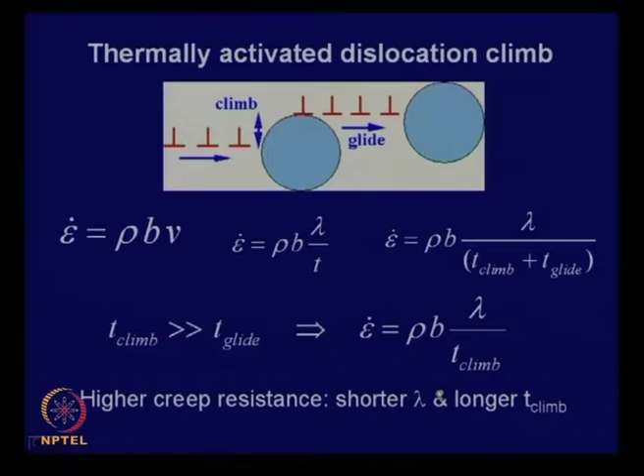With this we stop here. To sum up, what we covered today is dual phase steel, a special heat treatment called patenting, another heat treatment called Ausforming, alloy steel and why it is necessary to add alloy elements to steel, a special grade of steel called Maraging steel, and creep resistant steel. Thank you.